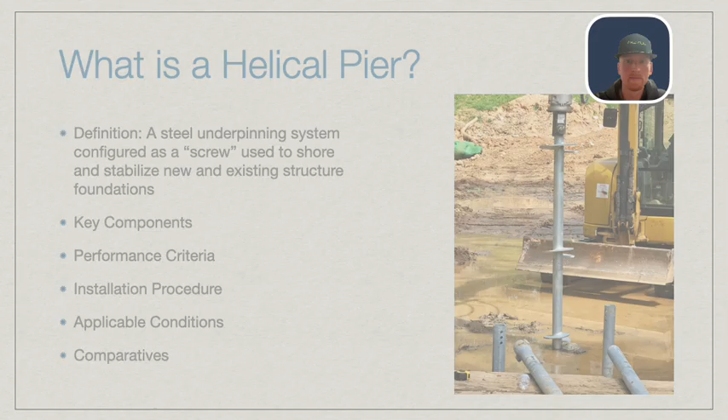So right at the top, we've got the key components. These can be broken down into three categories. You have the termination point, which is the bracket or cap located at the top of the pier. This is highly customizable and will be discussed between the manufacturer and the engineer of record specific to project parameters.

You have the bearing elements, which are the helixes that distribute the load to the soil itself. This is the business portion of the pier. These are also highly customizable and can be configured in single flight, double flight, and triple flight configurations.

The final portion of the helical itself is the shaft. This is the central steel pipe that actually transfers the load from the helixes to the structure that it's supporting.

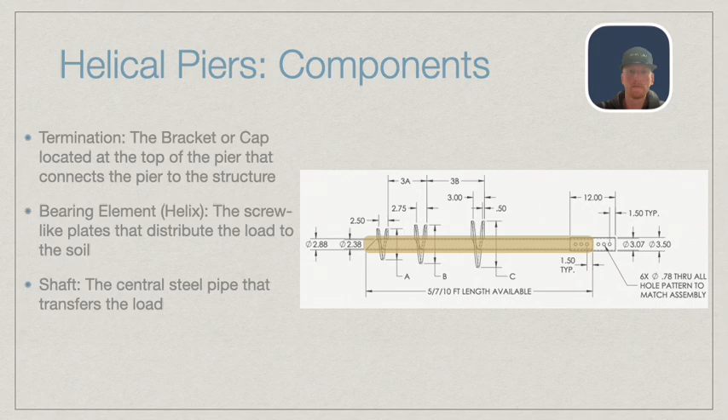Up next, we have the performance and engineering criteria. Now, when talking about foundation piers in general, you're going to be looking at either axial load or lateral load. Predominantly speaking, you're going to be looking at axial load, which is your compression and your resistance to uplift.

When discussing helical piers, this is going to be given in a factor of torque, and that's going to represent its load-bearing capacity. These things are verified against the pertinent specifications, which are listed right here. The first two have to do with the flighting. This is going to be specific to the content and grade of steel that's used and how it marries up to the shaft itself. The shaft is governed by ASTM A500. Again, quality of steel, grade of steel, wall thicknesses, all of that's going to be contained in there.

And the final portion of this is going to be found in ICC, which is going to govern the installation process. Now, this is an extensive document, but the primary takeaway from it is this formula right here. T times K equals QAll, where QAll represents the total bearing capacity.

Now, the T factor is going to be specific to the installer. They're going to have to include in their submittal documents the torsional capacity of the drive head that they will use, and then the PSI that they achieve during install. Those two factors are multiplied together to get your T factor. And then your K factor is a more empirical factor that comes from the size of the pier itself.

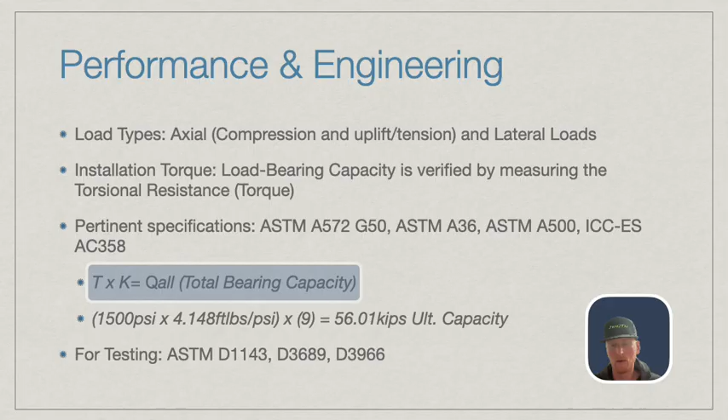Now that we've familiarized ourselves with the makeup of it, we have to go through the procedure. The first step is the most important one. This is the site assessment. The basic condition that you're trying to satisfy during this assessment is what are the existing site conditions. You have to evaluate this either with the geotechnical report or simply installing a test pier. That's going to help you determine your pier sizing and spacing.

In some situations, these piers are being retrofitted to existing structures, in which case there will be some excavation required, although it's minimal. This was used to expose the footings so that you can actually retrofit the pier and attach it properly. The next step in the process, you have an installation crew on site at this point, and they're going to distribute the materials throughout the job site.

They're going to couple the piers to the approved drive head, and the operator will engage the rotary hydraulics so that the pier begins advancing into the ground. Depending on the job minimum requirements, which is going to be inclusive of your torque or potentially a depth, you may have to add on additional segments, at which case the operator will decouple, the segment will be added, and they will continue the process of advancing the pier.

Once this is done and adequate kips have been achieved on everything, it's time to modify the piers so that they can accommodate the bracket or cap attachment. And again, this is how this mates up to the structure that it's supporting.

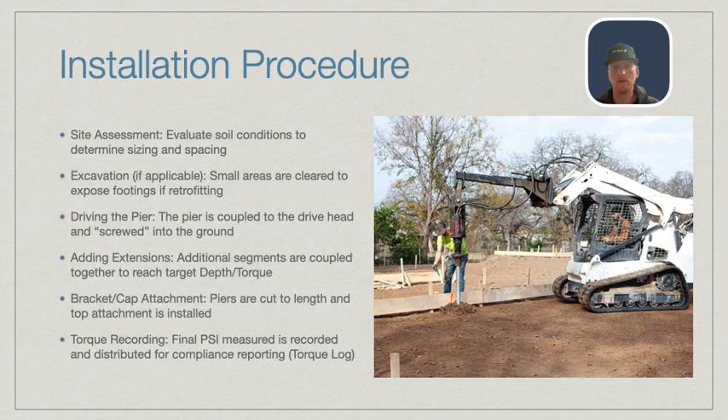The second most important part of the process is going to be the recording of the PSI achieved during the time of installation. This can then be put into the equation that we looked at on the previous slide, and the final bearing capacity of all the piers can be reconciled and approved by the engineer of record.

So now that we're experts in the fabrication and installation of helical piers, we need to know when they're going to be a viable option. And this can be summarized into three categories. First off, you have the low integrity soil conditions. These are going to be soils consisting of heavy clay, groundwater, or sand. These conditions make it either extremely expensive and time consuming to install traditional piers or impossible outright.

You have the accessibility constraint. The job site footprint does not allow the size of equipment that is required to install traditional pier methods into the job site, or weather conditions have persisted on a job site and they prohibit this equipment to physically get in there and do the work. The final criteria is going to be constraints on the schedule. While it may be a perfectly viable option to install traditional piers, there's just not enough time to do so.

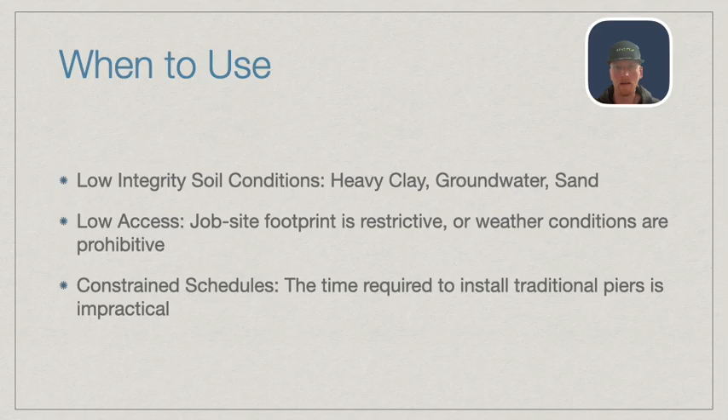I've referenced traditional piers a couple times, but as a brief summary, you have two primary categories. You have straight shaft piers and you have bell-bottom piers. The predominant difference is in fatty clay situations, a bell-bottom pier is incorporated so as to resist uplift, because a straight shaft pier, when the force is applied unevenly, will actually punch through the foundation of the structure that it's supporting. Now, both of these scenarios work fine in high integrity situations, but there's one situation that seems to dictate the demeanor of every project, and that's when groundwater shows up.

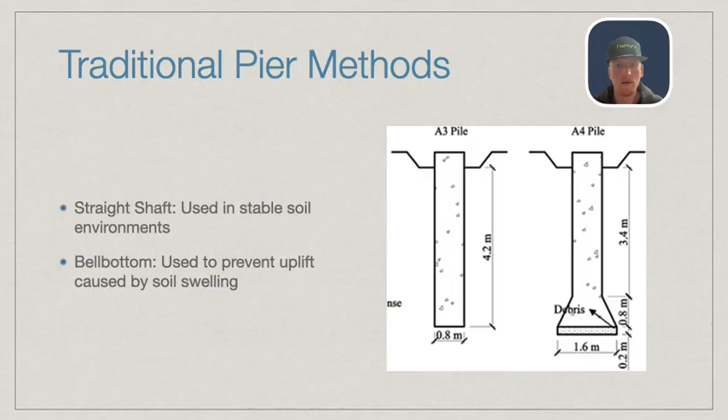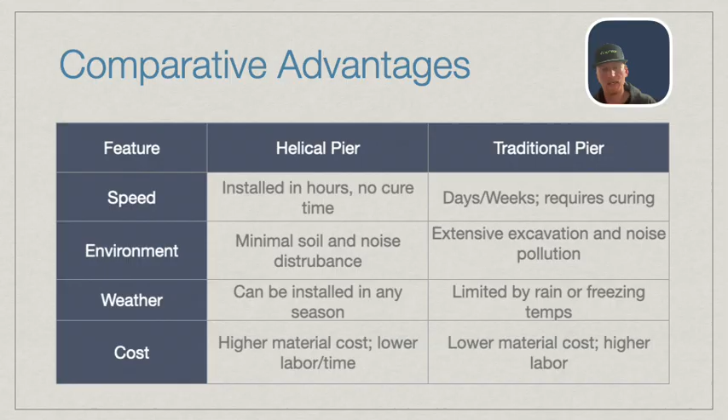So now let's look at the scoreboard. In all of these situations where a traditional pier goes up against a helical pier, you have the expressed benefits of a helical pier being that speed comes into play, the effect on the environment as a whole, it's not constrained by weather, and the cost, while initially more expensive, after the results of the project are complete, should result in a net savings.

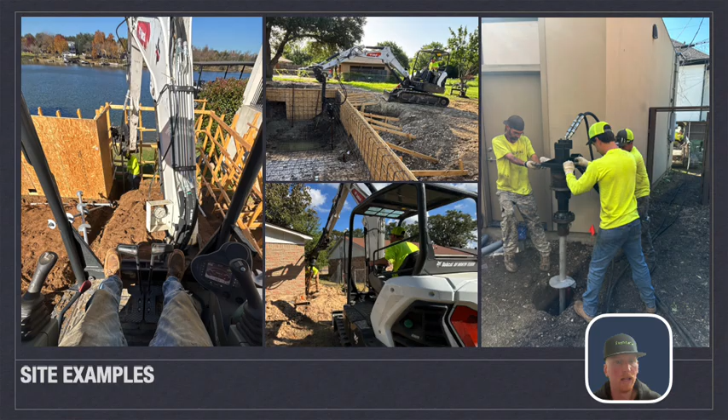On this next slide, we have a couple examples of where helicals can be installed. On the left and the top left, you have a couple of pools. Obviously, a drill rig is not going to make it down into those environments. Below the pool picture is a helical pier being installed for foundation repair. This is in a restrictive environment that a drill rig absolutely could not get into.

And then here, pictured on the right, is one of the most competitive advantages a helical pier has. You can actually detach the drive head from the machine and run out lengths of hydraulic hose so that the pier can be installed in environments where a machine physically can't go.

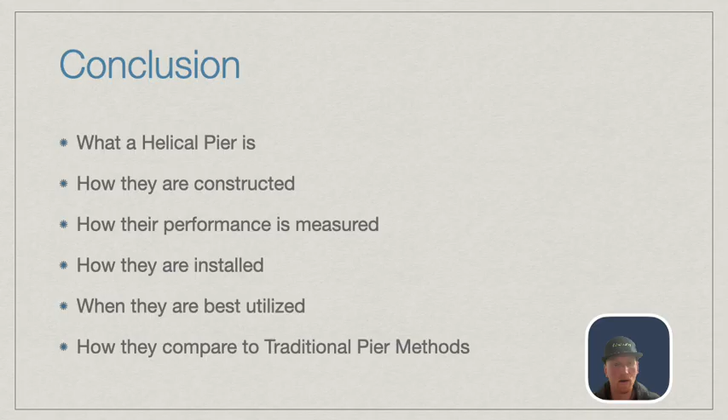So in conclusion, we've discussed the helical pier. We've discussed what it is, how it's made, how it's measured, how it's installed, when it's best utilized, and how it compares to traditional pier methods. The helical pier provides a very viable and time and cost-saving alternative to the cased pier, or in some instances a belled pier, for construction projects that are prohibitively restricted by the constraints that we discussed earlier.